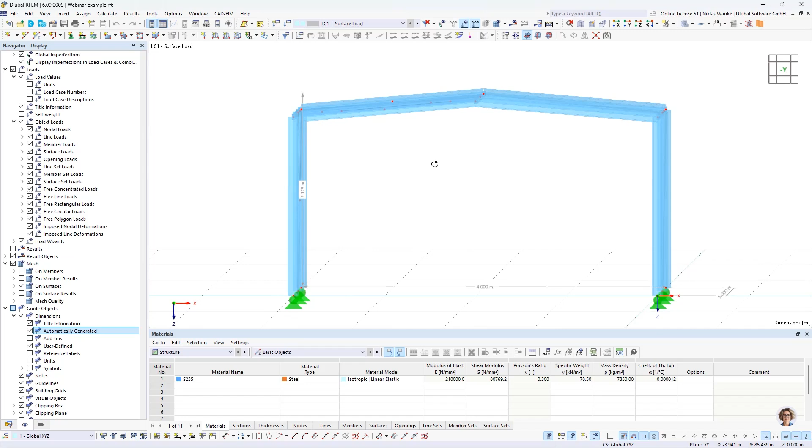It's a really small hall, 4 meters by 5 meters. Maybe you can park your cars under it or something like that. The hall has a height of 2 meters, and the roof has a little pitch, so the height difference is 17.5 centimeters between the middle and the rim of the hall.

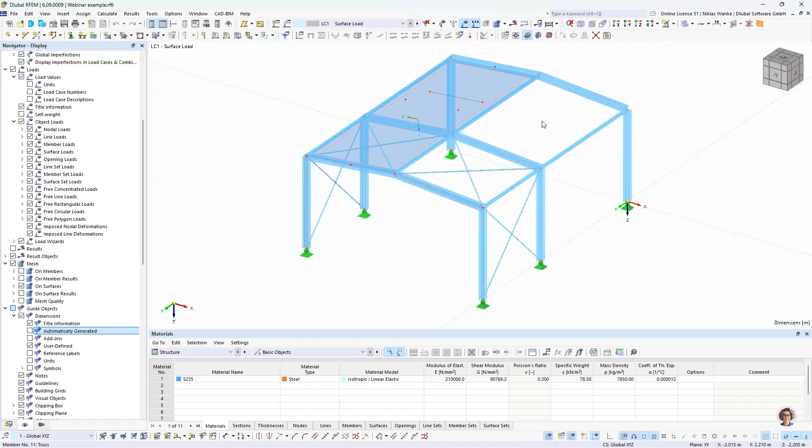As you can see, I already created one surface for one half of the roof, and this is already a load transfer surface. For the second half of the roof, we will model this surface together so that you can see the process of modeling it.

For that, I will choose the option New Surface with the option Select Boundary. Now we are in the surface dialog, and first of all, we have to select our stiffness type.

This is where the magic happens, because here you can select the load transfer surface, and that's exactly what we want for this webinar.

An alternative would be to select another stiffness type, for example standard stiffness. Then you can create your thickness and your material. In this case, it would be possible to activate the option Activate Load Transfer, where you can consider the stiffness of the surface but also do the load transferation.

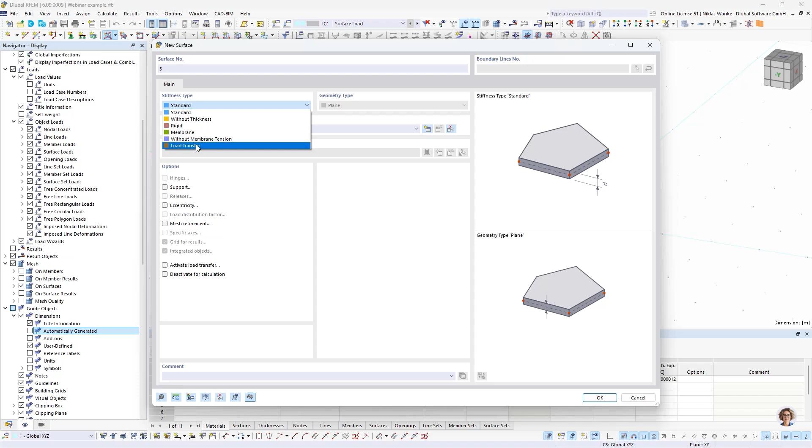But for this example, I would like to choose the load transfer stiffness type, which means we don't apply any stiffness to the load transfer surfaces, just do the load transfer. As you can see, this option is in this case automatically activated.

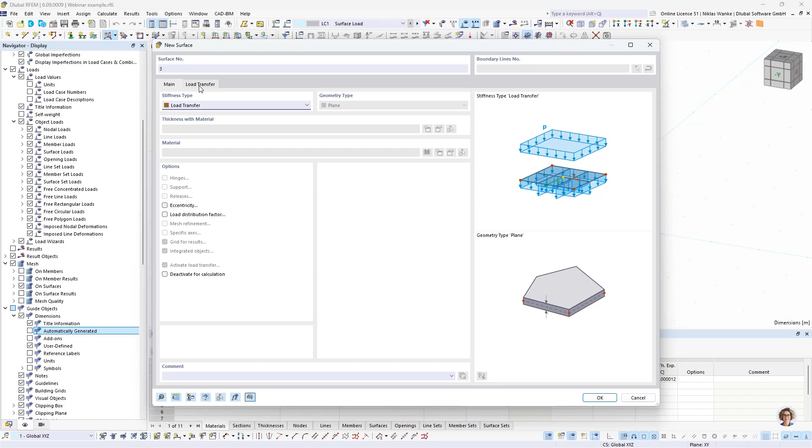By choosing the load transfer stiffness, we get an additional tab, and this is where we can make all our settings for the load transferation.

First of all, we want to have a look at the categories area, and the first setting is really important: this is the load transfer direction. Basically, we offer two different methods of load transfer for the surfaces.

The first method is called isotropic FEA, and the other method is called the stripes method. These two methods work completely differently, and we will have a look at both. But first, let us select the isotropic FEA method.

I want to give you a small explanation about how this method works. For that, we can have a look at this picture at the bottom right of the dialog, because in this picture it tries to explain how this method works.

So this first picture is what you see in the main model. You have your load transfer surfaces, you have probably a connected member or other connected objects, and you have your applied load. In this case, it's a surface load.

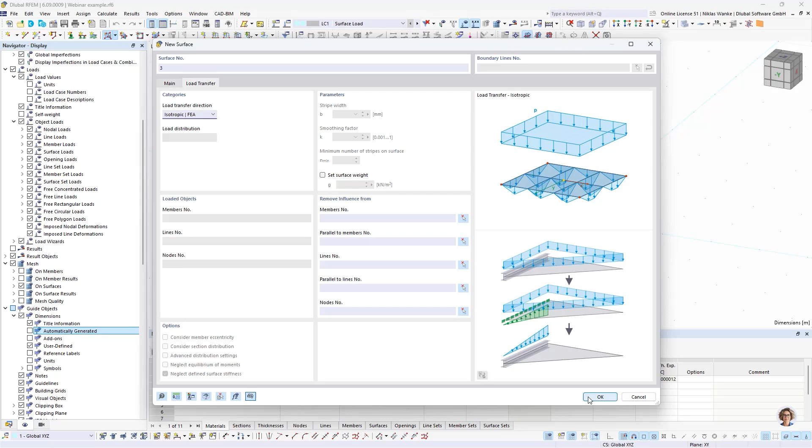But first, let us finish the creation of the surface. So I apply with pressing OK. Then we have to select our boundary lines so that the surface will be created. So that is done.

Now, of course, we also have to apply a load, because without load we would not see anything. Therefore, I create a new surface load. I want to have a load magnitude of 1 kilonewton per square meter to keep it simple, and the load direction should be in global Z on projected area.

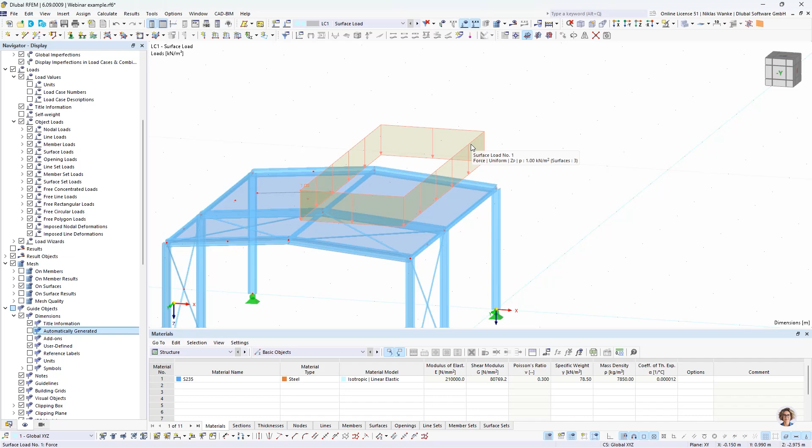We can apply this and select the loaded surface, which should be the right load transfer surface of our roof. Now we see the defined surface load, but basically that's not the visualization or the load that we want, because we want to transfer this load to the connected members.

To see how this load is transferred, we have to change the visibility a little bit. So we will go to the navigator display, and you will find the setting under Model, Surfaces.

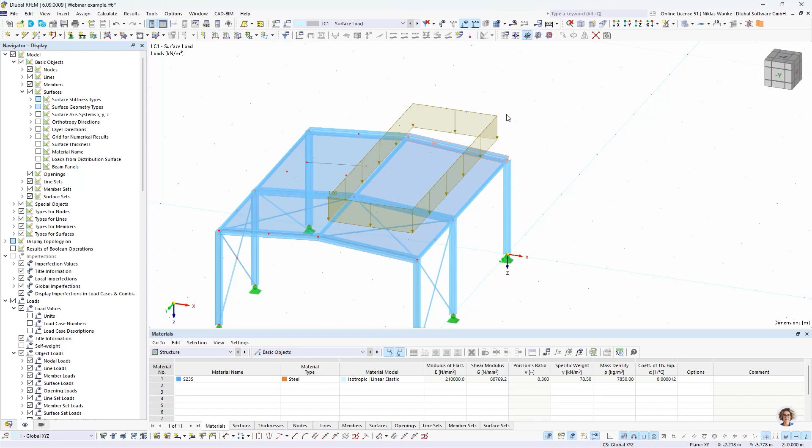Then you can see there's the option Loads from Distribution Surface. If we activate this option, then we will already see the distributed or transferred loads and not the surface load that we can see at the moment. So I will activate it.

And okay, we don't see anything. Why is that so? Because the submodel, which I talked about, has not been calculated yet. So to start this process, we have to start a calculation of this load case.

As soon as I start the calculation and the solver starts, you will see that there are two separate calculation processes. That's a hint, because the first calculation process is made for the submodel, and after that we do the normal calculation process for our main model.

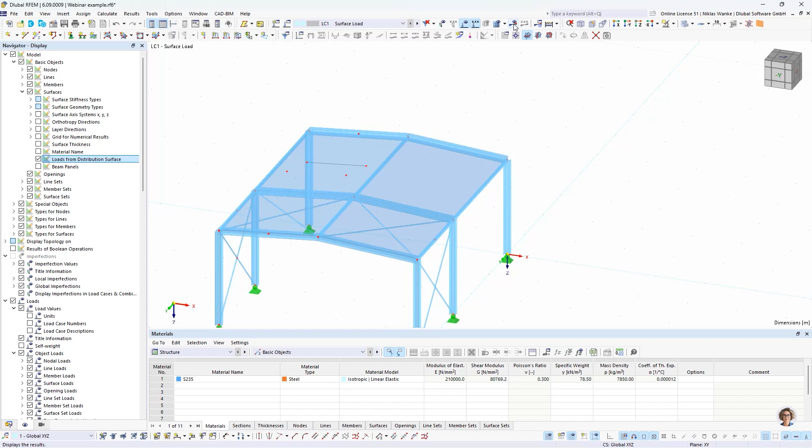So I hit the calculation button. Now the mesh is generated for the submodel, and now the structural analysis, or static analysis, is done for the submodel. If it's finished, we should see loads. That's the case now. And now the mesh is generated for the main model, and now the static analysis is done for the main model.

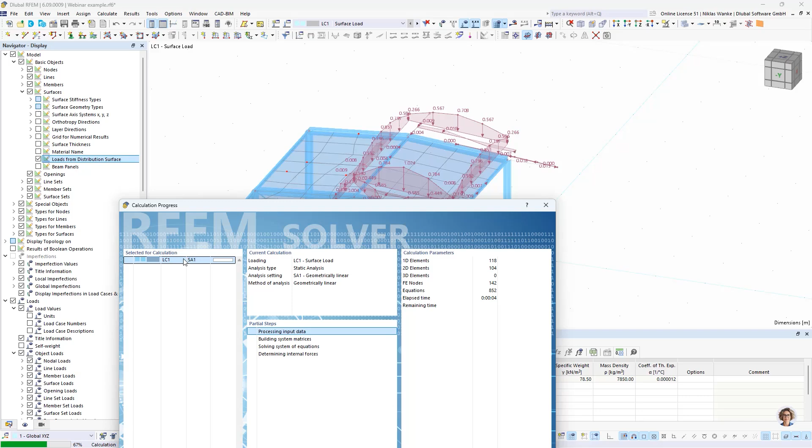After that, we will receive our results for the main model. I think it's clearly visible in the solver that the submodel has to be calculated first, so that we receive these transferred loads.

In this case, my horizontal bracing has also received some loads, and probably that's not what I want. But that's not a problem, because we can simply deselect these members to be loaded. For that, we go back to the load transfer settings.

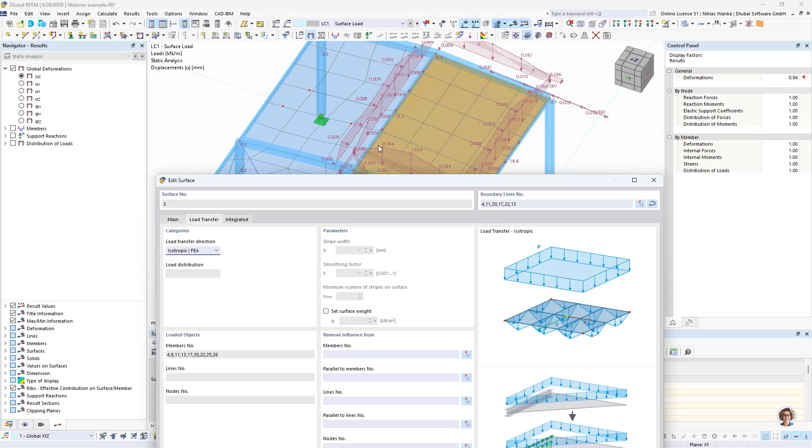Here we can select in the middle part of this dialog which objects should be loaded. By default, all members, all lines, and all nodes which are part of the surface, so these are integrated and connected objects, are loaded by default. But we can remove the influence of some of these objects.

For example, I will choose the members of my horizontal bracing. By clicking OK, we of course have to calculate again, but then these members won't be loaded anymore.

It's also possible to select one member and all members which are located parallel to the selected member, and then remove the influence from all these parallel members. The same applies for lines and parallel lines, and for nodes.

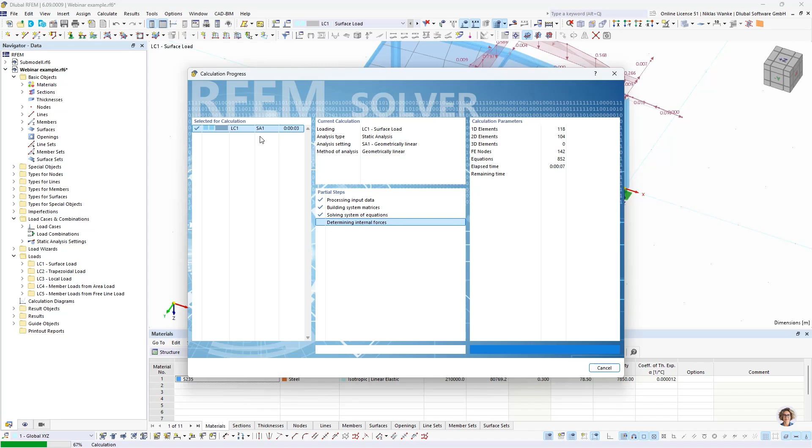Okay, let's calculate this again. Here we see again that it's calculated two times: first time for the submodel, and second time for this steel hall model. That was the first time, and now the steel hall is calculated. And now it's finished.

Okay, so now we received our transferred loads. I can also switch back to the original load, which is the surface load, and switch back to the transferred load. In this case, we only have member loads.

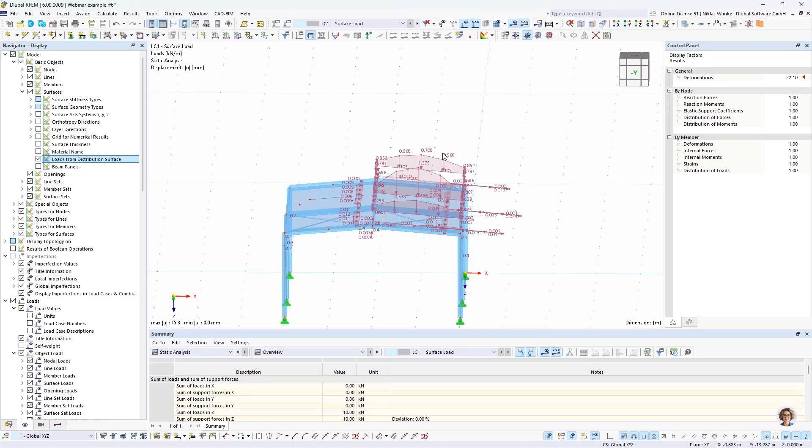The main load is a vertical load as expected, and we have some small effects which result in horizontal loads, but most likely you don't have to pay any attention to these loads because they are really small, like 0.001 or 0.02. That is just an effect of the FEM calculation.

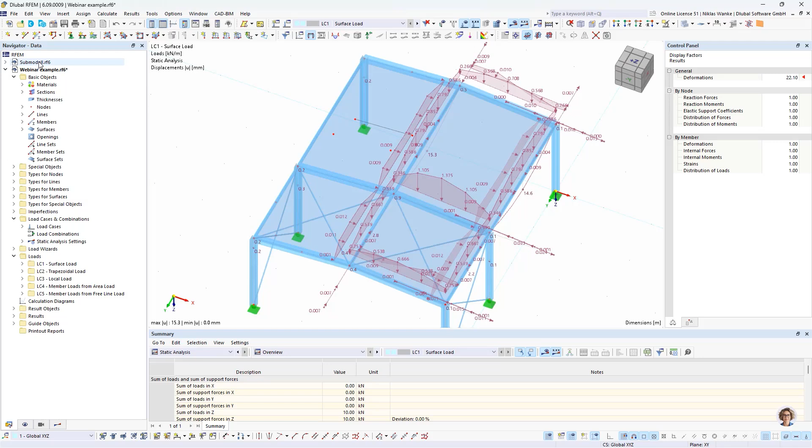Okay, I would like to show you the submodel as well. I prepared this in a separate model of RFEM 6. I just created the submodel of this one load transfer surface. As you can see, we also have the roof pitch, and the surface load on the surface. In this case, the members, as I said, are now modeled as fixed supports.

The definition of the surface is a bit special. It's not a complete rigid surface, but a surface with the stiffness type standard and a defined stiffness matrix. Let us look into the stiffness matrix. We will see that the different stiffness coefficients are set to a relatively high value, like 1e+10 or 5e+9, or maybe here also 1e+11. So this is a really high stiffness, but it's not a complete rigid surface. It still has a finite stiffness.

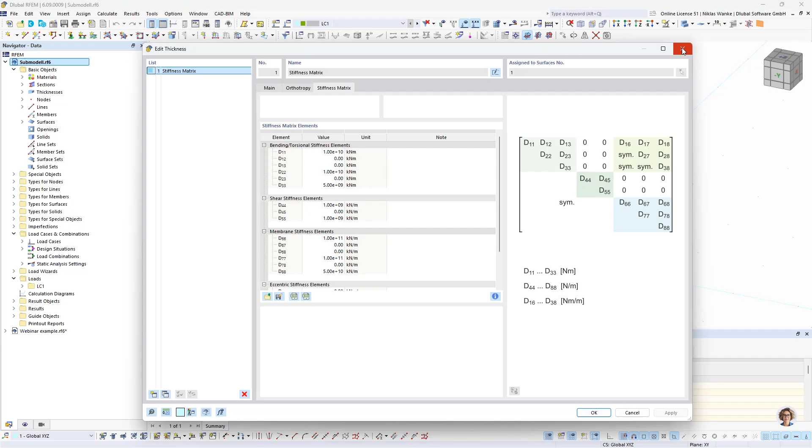The reason for that is because this leads to a better result, or to a better load distribution. That's why this load transfer surface is set to this stiffness in the submodel.

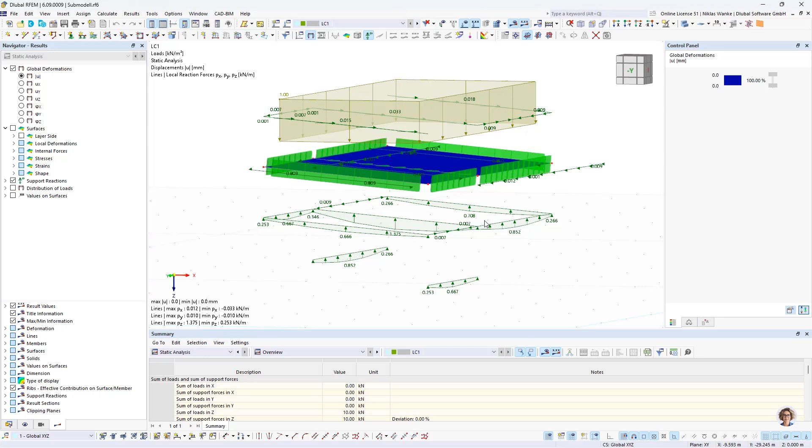If we calculate the system, then we will receive the support reactions of these fixed supports, and this will be exactly the load which is applied in our main model. So for example, we can remember this value here, which is the peak value of the middle rafter.

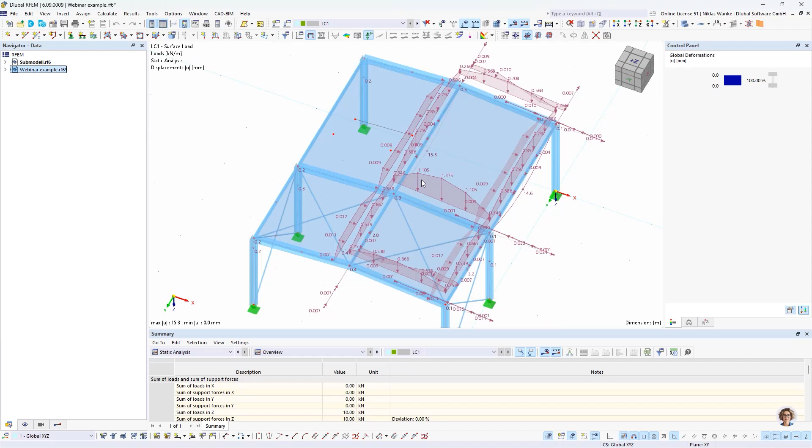In this case, we have 1.375 kilonewton per meter. And if we switch back to our main model, we will find exactly this value, which is 1.375 kilonewton per meter. So, I think we have proved that it is the same.

Okay, so let's go back to the definition of the load transfer surface. This time we will have a look at another method, which is the stripe method.

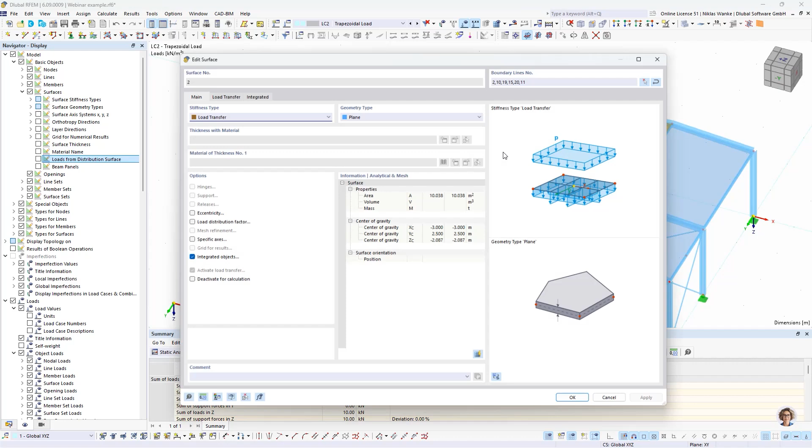Therefore, I will go to a new load case, the second load case, where I defined a trapezoidal load for the left side of the roof. Let us have a look at the load transfer surface, which I have already defined.

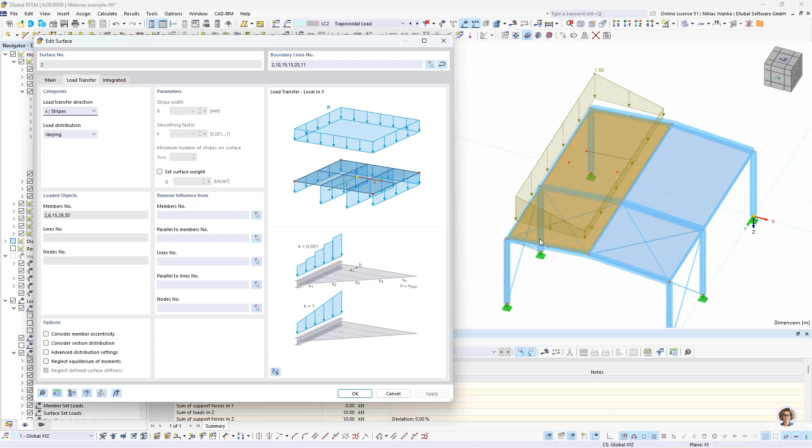So we go back to the tab load transfer. And in this case, we see we have defined X stripes. And this means that the surface, which we see here, is divided into many, many stripes along its local x-axis.

If we strive over with our mouse, we can see the local x-axis is located in this direction. So it means that the surface will be cut or divided into many stripes, like I am showing with my mouse. You can imagine it like if there would be many single beams lying in this direction on the roof.

And every of these beams or stripes is loaded with this trapezoidal load. And always if such a stripe cuts a member, like these rafters or the horizontal bracing, then these members will be loaded by the stripe. I will first select the loads from distribution surface so that we can see the result of the load transfer. As we see now, the horizontal bracing is also loaded, and our rafters.

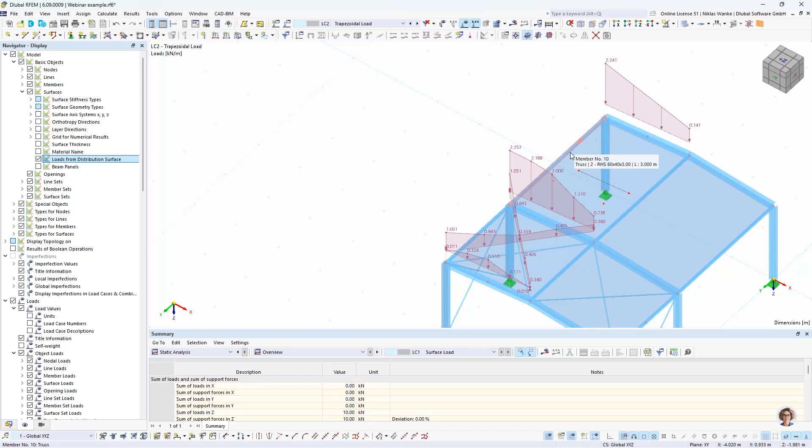What is not loaded is the purlin of the rim and of the middle. The reason for that is because the purlin is completely parallel to the stripes direction, so it does not receive any load. If we change the stripes to Y stripes, then the purlin should be loaded and our rafter should not be loaded anymore. So I will change it and apply.

Now we see the purlin is loaded, but the rafter is not loaded anymore. So these are the two options you have to divide the stripes in X or Y direction. The third possibility would be to mix these two stripe directions, so in this case you have X and Y stripes, basically a mix of the two methods. If we select it, you will see that now all members, unimportant of their direction, are loaded.

Another option that comes with the stripes method is the load distribution. Normally it's set to varying, but it's also possible to set the load distribution to uniform, and in this case you will always receive a constant load distribution on any object. So if I set it to uniform, we will see that this linear load distribution will change to a constant load distribution.

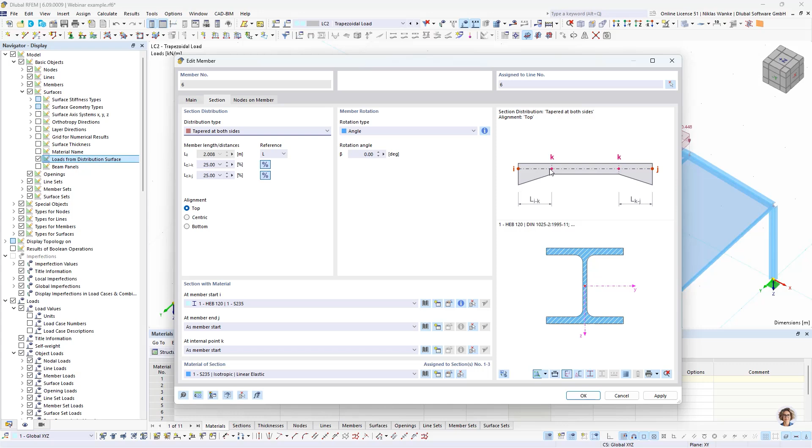This can lead to small differences between the load transferation, but the difference should not be too big for most cases.

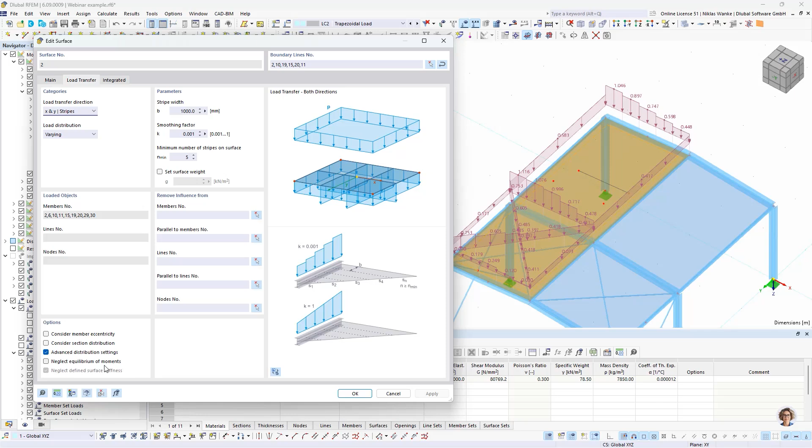One last option is neglect equilibrium of moments. By default, the setting is deactivated, which means that the equilibrium of moments is considered. I can show you that in my third prepared load case. Here I defined some local loads on our load transfer surface: two nodal loads, a free line load, and a free rectangular load.

This could probably happen if we have, for example, air conditioning on the roof, or if there are pipes connected with the roof. So these could be cases where we have such types of loads on our roof, and of course it's also possible to transfer these loads applied on the surface to the connected objects like these members.

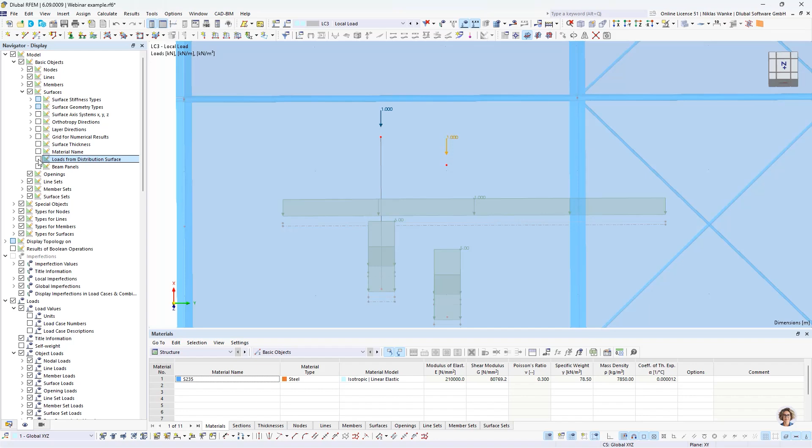Normally, the equilibrium is considered. This means, for example, for this load, it's located at 2/3 of the span of this roof. So 2/3 of the load would go to the right rafter, and 1/3 of the load would go to the left rafter. This is the case, as you can see.

I still want to change something. I will change it back to X-ray so we can see it a little bit clearer. As I already explained, 2/3, which is the value 0.667, goes to the right rafter, and 1/3 of the load, which is 0.333, goes to the left rafter. Equilibrium of moments is considered for the distributed, or for the transferred, loads.

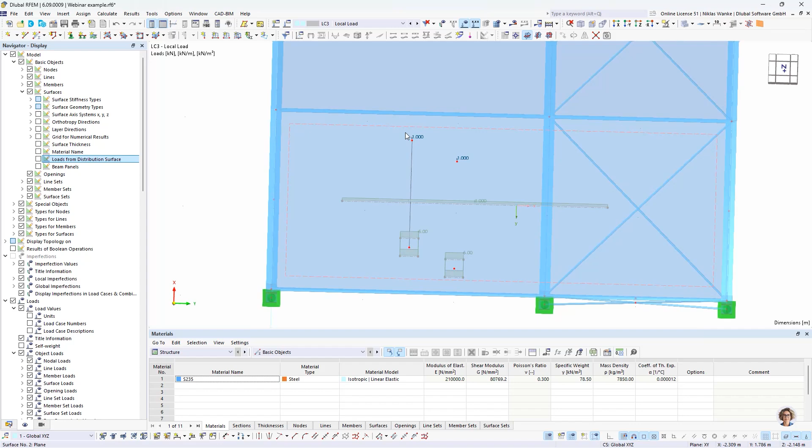Same is for all other types of loads. But now, if I activate the option neglect equilibrium, then the equilibrium does not matter anymore. So what does it mean in detail?

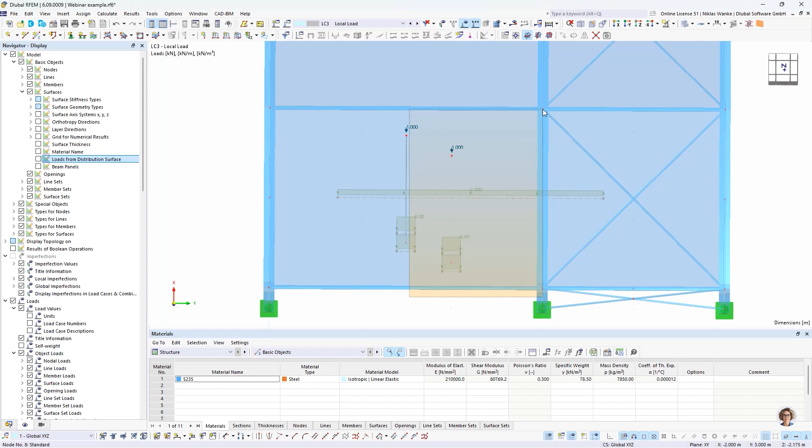It means that now you can imagine there's a cut done in the middle of this span between the left and the right rafter. Every load located on the left side of this cut will be transferred to the left rafter, and all load located on the right side of the span will be transferred to the right member. This would mean, for example, that this free rectangular load, which is completely located on the right side of the span, will be completely transferred to the right member. So that's different to the case before.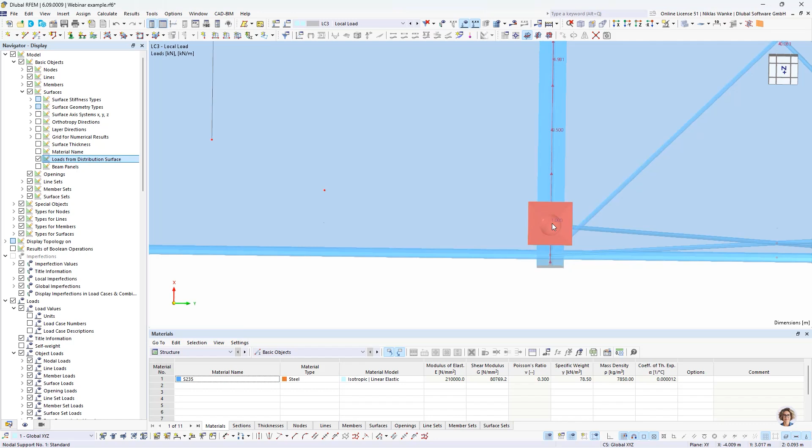If I activate the load from distribution surface, we will see this. Now we have the complete load on the right rafter of this rectangular free load, and on the left side, we don't have any load in this case. If the load is located completely in the middle, then it will still be like before, so we have half on the right and half on the left.

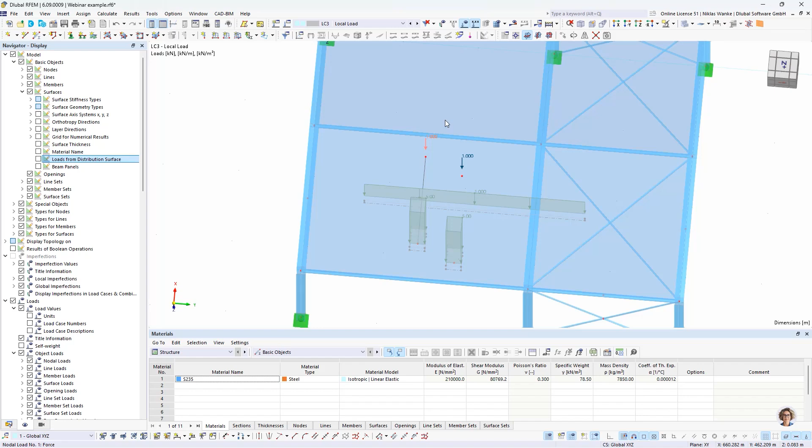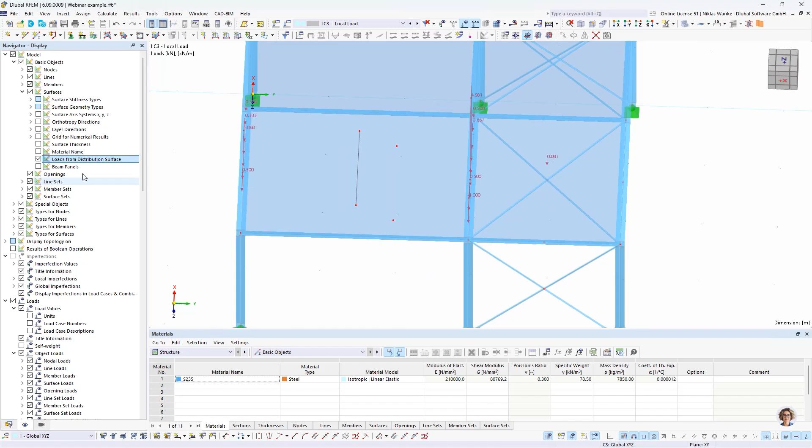There's also one special case, because for these loads, which are nodal loads, the equilibrium is always considered correctly, also if the option is activated. So also for this load, which has eccentricity to the middle of the span, the loads are still distributed 2/3 and 1/3. But for all other loads, the equilibrium won't be considered anymore in this case.

Okay, I just remembered one thing that I would like to show you again. By now, we always only transferred the surface load on this load transfer surface to members which are connected to the surface. But I would like to show you that it's also possible to transfer it to lines or to nodes, like shown here.

Now it's not transferred to these objects. The reason for that is because these nodes and this line are no structural objects. It's just geometry, and it does not have any stiffness or something like this. So that's the reason why the loads are not transferred.

But if I, for example, put such a nodal support on this node, then it will instantly also receive a load. Same is for the line. I could put a line support there, and then we will see, okay, now also the line has some loads transferred to it.

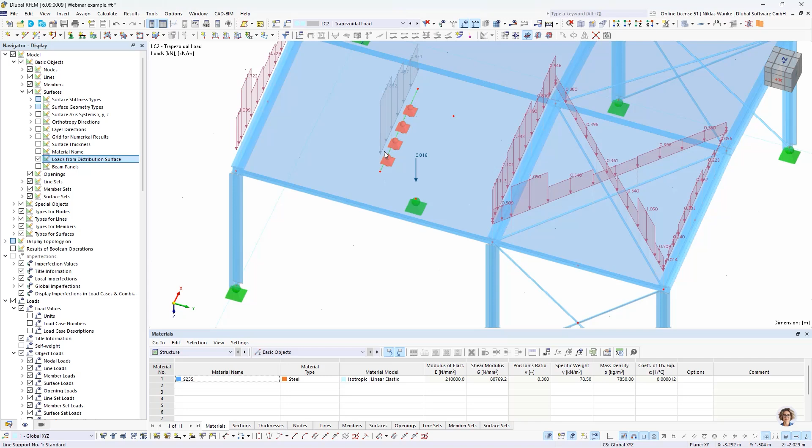Of course, that's also possible, for example, if you have a wall which is connected to the load transfer surfaces in this line, then also the wall will be loaded. And same for the nodes. If we put a column on this node, let me do it really quick, then also this column, of course, has a stiffness and will be loaded.

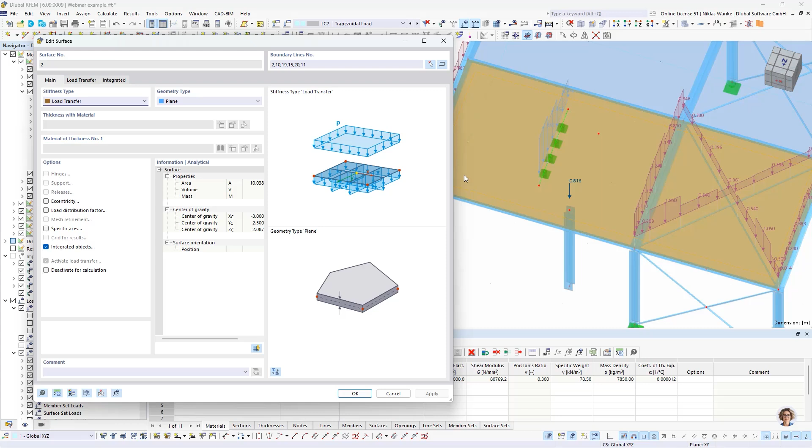One thing you have to keep in mind is that only the load of this stripe, which the node or the line is located in, will be transferred to the column. This means if you select the stripes method in this case, it really depends on the stripe width. Now we have a very big stripe width, we only have 5 stripes, so the column is getting a relatively high load.

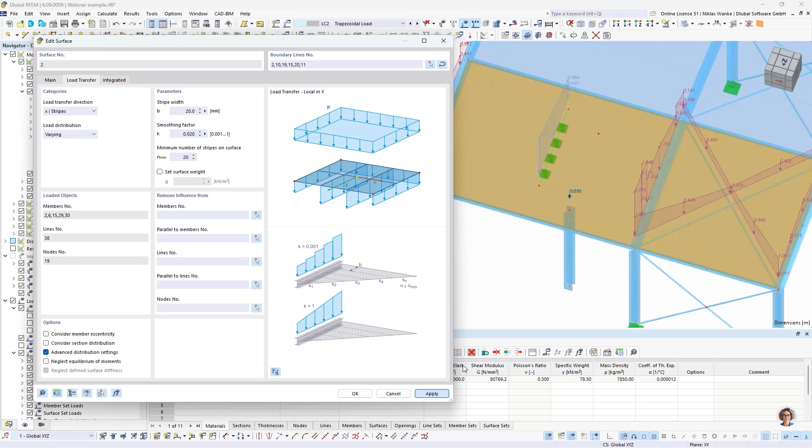But in the normal default setting, let me change it back to the default setting, we only have a stripe width of 10 millimeters. This means that the column will only receive a really small load. If I press apply, you see now it's only 0.02. And if I double up the stripe width, we will receive the doubled loading, which is 0.04 now. So that just means the stripe width has a big influence on the loads on columns in this case.

This is why I would recommend to use the isotropic method if you have some structure like this.

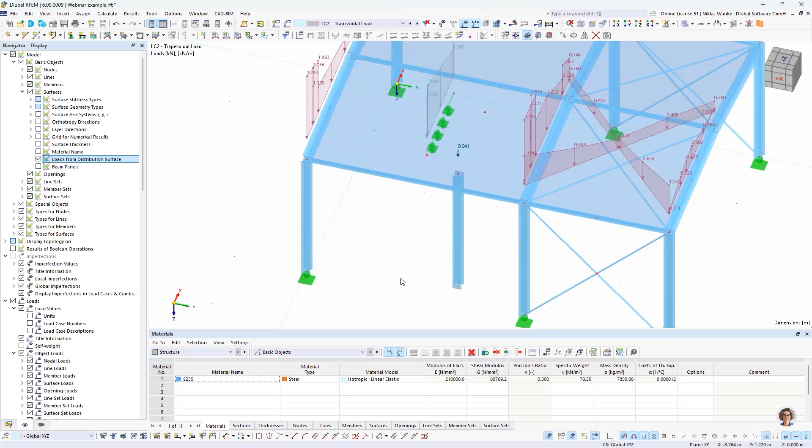Okay, let us remove the column and the line support, because in this case it would not make much sense to have a column here. And now we are back to the default system.

One last thing that I would like to show is that load transfer surfaces can also be used for other geometry types, so you don't necessarily need a plane surface. You can also use curved surfaces like quadrangle. Load transfer works the same, and it's still possible, and I think that's a really useful feature and a big advantage.

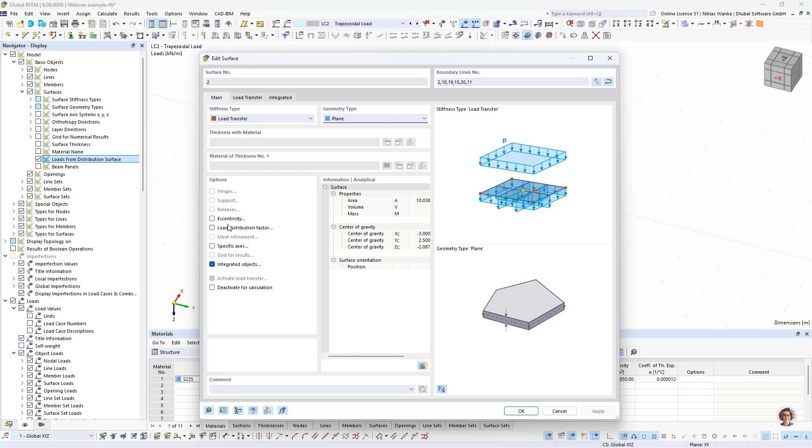That's basically the last thing I want to explain for the load transfer surface: the load distribution factor. That's an additional option for the load transfer surface, and if you activate it, you can define load distribution factors if you want.

By changing the factor for some members, for example, I can say this member should receive a higher distribution factor, and we choose 1.3 or something like this. Then we will see that the transferred load will increase. I have to apply it, of course, and now you see the load has gotten bigger.

Be careful with this function, because if you increase or decrease the distribution factor, you will also increase or decrease the sum of the loads. So you will receive a higher surface load, or a higher load at all. This means you increase the absolute values of this load, and it's not relative to the sum of the loads.

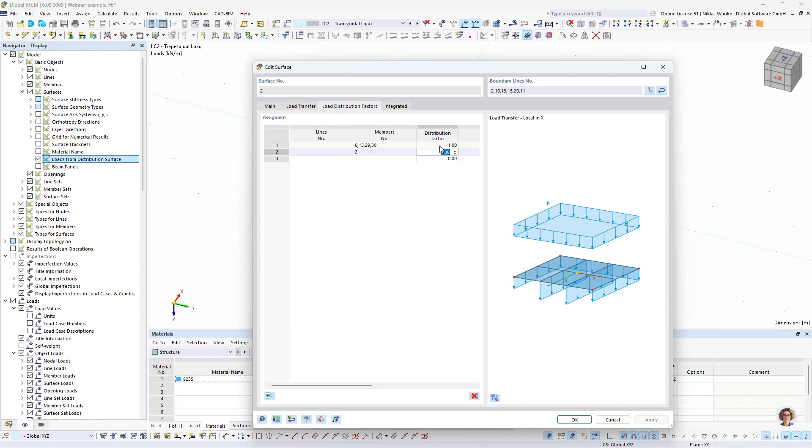But in my opinion, it's also a really useful feature if you want to manually have an influence on the load transferring. Okay, that's already everything I wanted to explain for the load transfer surface.

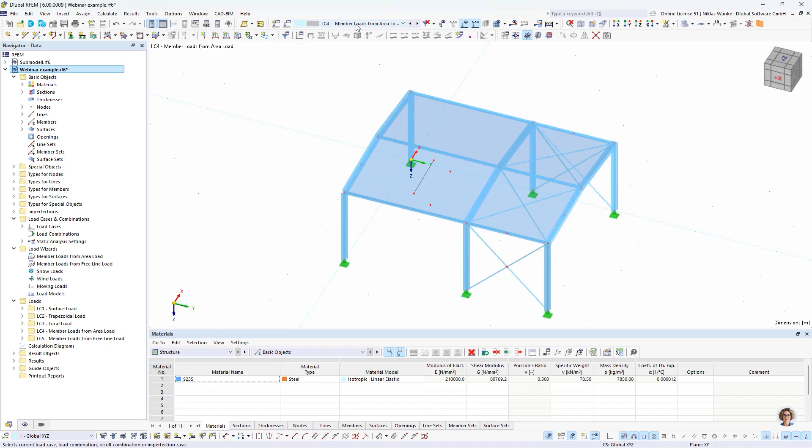As I said at the beginning, we also have two other points we want to look at today: the two load wizards, member loads from area load and member loads from free line loads. To show that, I will switch to load case 4 that I already have prepared, and use it to show you the first load wizard, member loads from area load. For example, we could imagine that we want to apply member loads from an area load, which is the result of a wind load on our steel hall wall.

Therefore, we can create a new load wizard. We can do this by double-clicking here, or by right-clicking and selecting the option New Load Wizard.

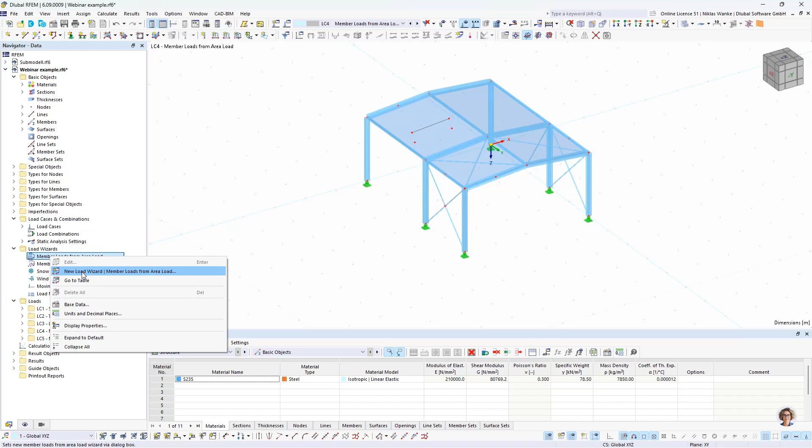Now we see the dialog for the definition of member loads from area load. This load wizard has an advantage: we don't have to manually define our surface, like we had to do for the load transfer surface. So we don't need any surfaces at all. That's especially an advantage if you are working with RSTAB, because there you don't have any surfaces available, and you can still use the load wizard member loads from area load.

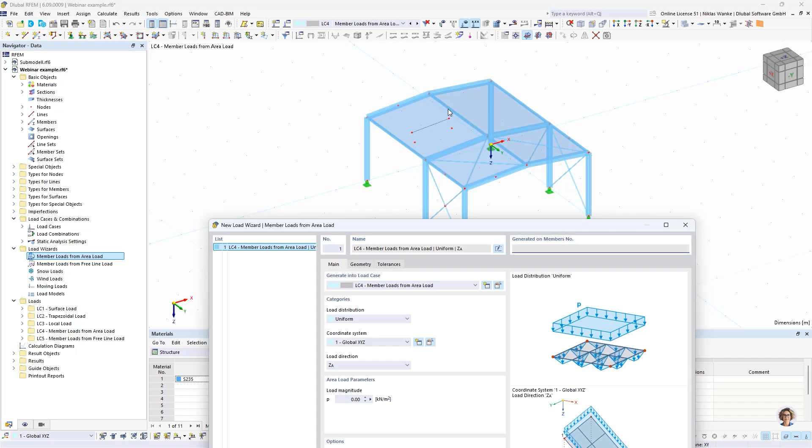The disadvantage of this load wizard is that you can only apply surface loads. For the load transfer surface, we saw that we can also apply nodal loads and free loads, so we can apply every type of load to the surface. For this load wizard, only surface loads.

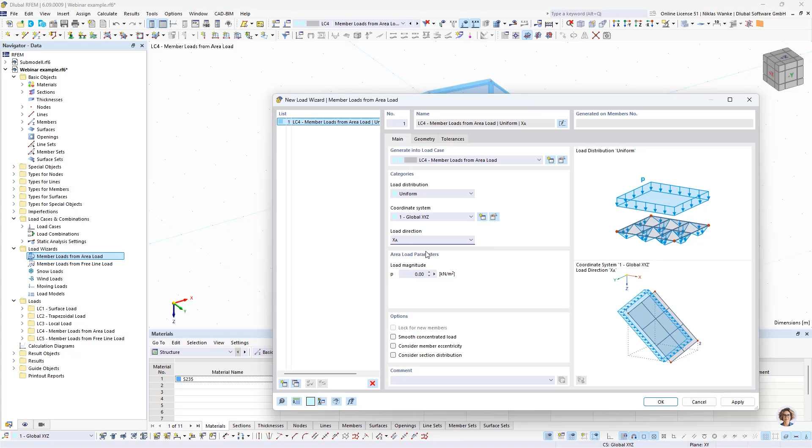Okay, let us generate our load. We want to generate it in load case 4, and we want to choose the uniform load distribution in global X direction, so I choose global X. And the load magnitude should still be 1 kilonewton per square meter, to keep it simple.

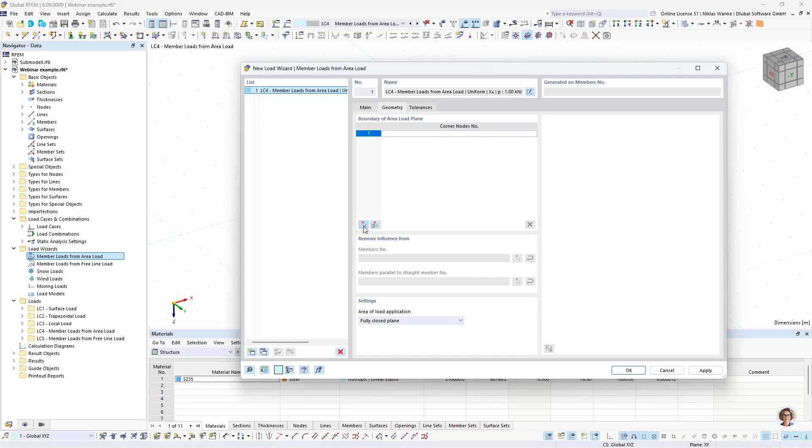There's one more thing we have to define to finish the input for this load wizard: the geometry of our surface load. We can pick our corner nodes for the area or surface we want to apply the load on, and I think the easiest way is to pick the nodes in the main model. So I select the corner nodes here of our wall of the steel hall.

And now we are ready to go, so we press OK, and that is the result. Normally, by default, we still see our defined surface or area load, but again, it would be interesting to see the transferred member loads, because these are the real loads considered for the static analysis.

To achieve this, we go back to the navigator display, scroll down a little bit to load wizards, then member loads from area load, and here we can choose the option display separately. Now we see the load distribution on the members. Alternatively, you can also select the load wizard load, right-click, and choose display separately — it's basically the same.

Okay, now we see the loads, and you might wonder why there's such a corner here, and here's also a little corner on this load. I can explain why this is happening.

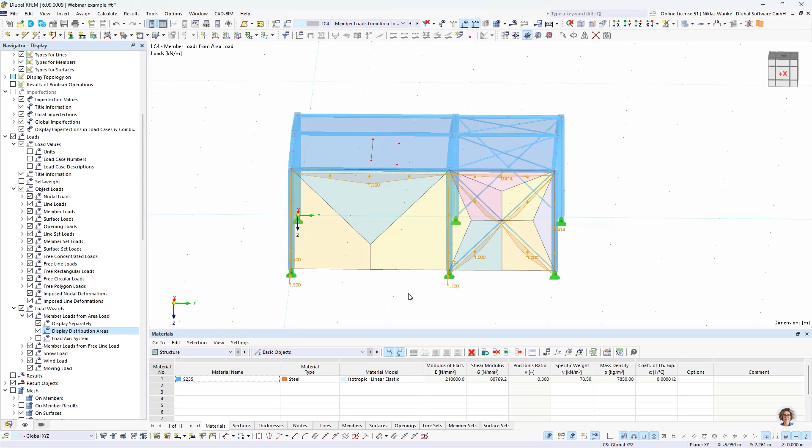In this case, it's really useful to have a look at the distribution areas of this load wizard. This is possible to show in RFEM 6, and I think it's a really powerful and cool feature. To achieve this, we go to the navigator display and select the option display distribution areas. I enable this, but I still don't see anything because I first have to select the load wizard that I want to show the distribution areas for. Now I select it, and we get a really nice overview of the distribution areas. By seeing that, it becomes a little bit clearer why we have these peaks or corners in the load. Now it makes much more sense, and it's a good visualization option in my opinion.

Let us go back to the definition of this load wizard and have a look at the additional options. These two options will be familiar to you because they're the same as for the load transfer surface. Here you can also consider the member eccentricity and the section distribution if you want. So it's completely similar to, or identical to, the load transfer surface.

Then we also have this first option, which means lock for new members. By default it's deactivated. That means if I would create a new member now, like an additional column, it would be synchronized with the load wizard, and this additional column would also be loaded, or the loads would be transferred to it or to any new member. If we check this box, we can lock this state we see here, and I can add any new members in this plane and they won't be loaded.

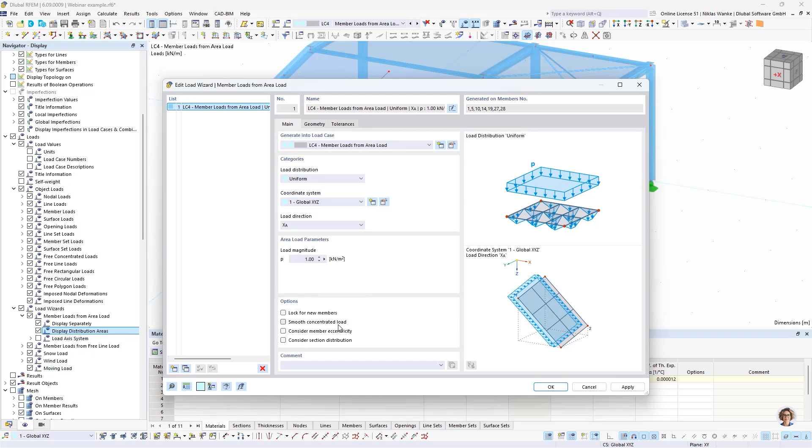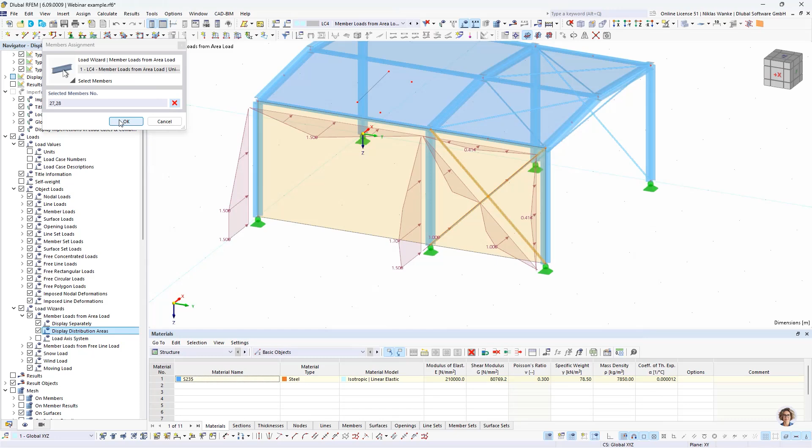The smooth concentrated loads option I will show in some minutes, but first we will switch over to the geometry tab. Here we also have the option to remove the influence for some members, basically the same as for the load transfer surface. For example, if I want to remove the influence for the horizontal bracing, I can do it with the selection. I apply it, and now we see the horizontal bracing is not loaded anymore, but the other members receive a slightly bigger load instead.

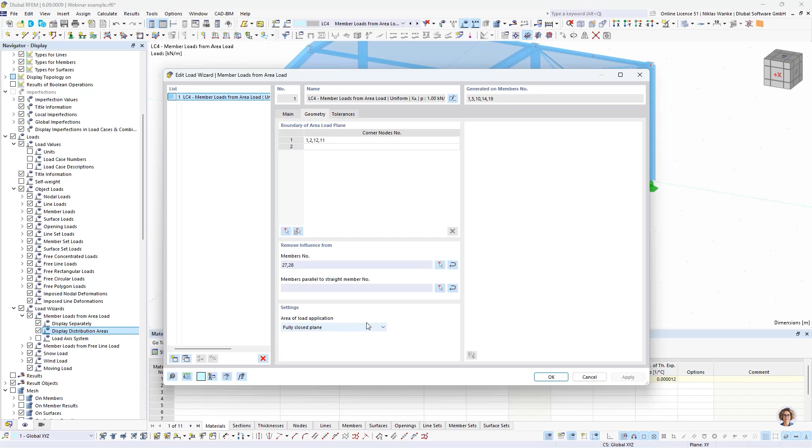Then there's also a really powerful setting, in my opinion, and you can do many things with it: the area of load application. By default, we apply the load on a fully closed plane, meaning this complete plane has an area load which has to be applied on the members. The second option would be to only have an empty plane, with the load only on the members.

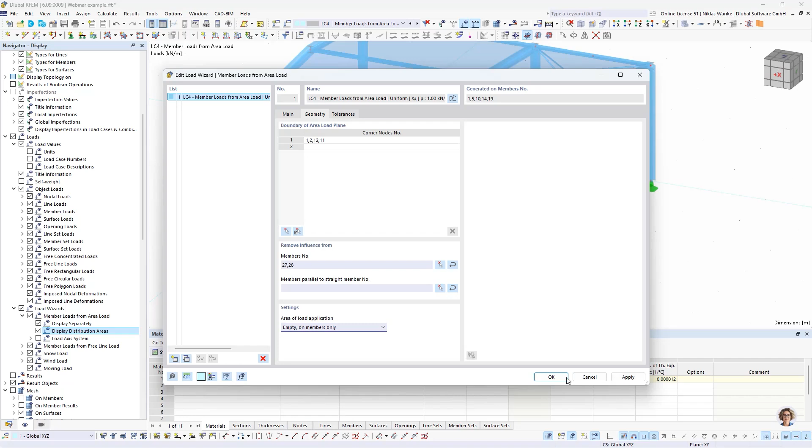Let me choose this option and apply it. First of all, we see the loads are getting much smaller, because now only the surface where we have our members is loaded. For example, you can imagine that this hall is open, so it has no wall, only the columns, and we have a wind load. The wind can flow through the hall, and it only creates wind pressure on the members. So this would normally be the use case for this option.

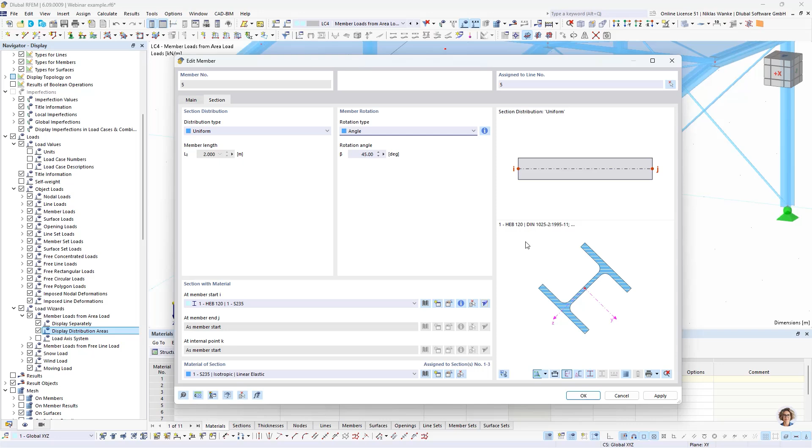What is really cool about it is that the exact surface of the section is considered. This means the columns with the bigger cross-section also receive a bigger load than the purlins with a smaller cross-section. What is also considered is the rotation of the member. If I define a rotation of 45 degrees, we will have a bigger load distribution area for wind loads, for example. As you can see, the load will increase to 0.17 kilonewton per meter, whereas with the unrotated member it's only 0.12. So that's a really powerful tool, in my opinion, and especially for wind loads this can be really helpful, for example for truss systems and so on.

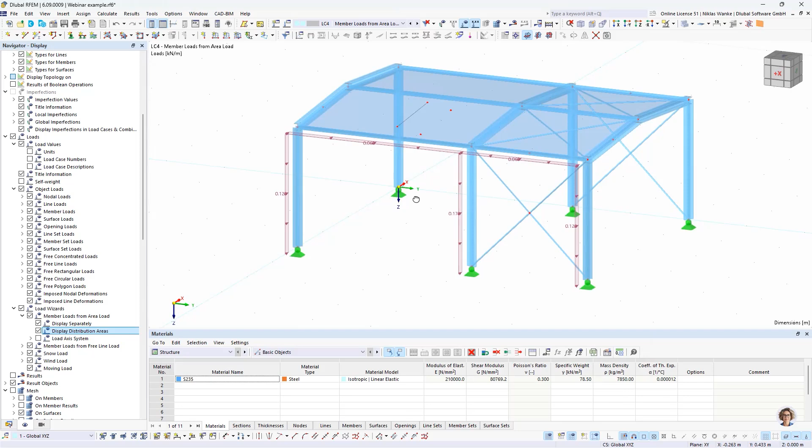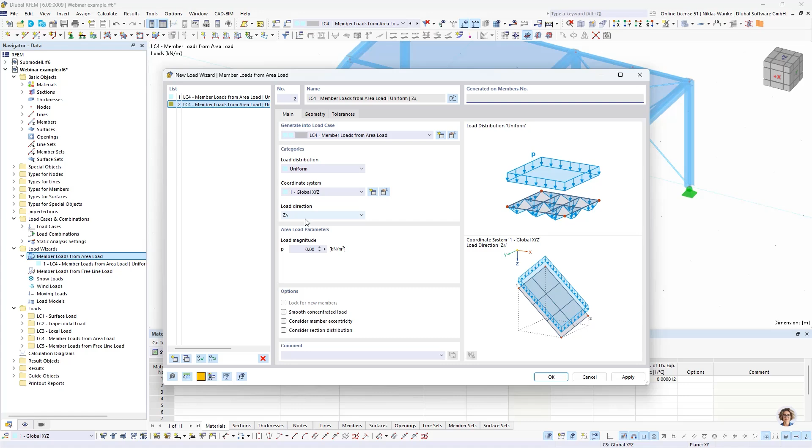To show the other functions for the load wizard member loads from area load, I would like to create one more load wizard. Basically it's possible to create as many load wizards as you want in the same model; it's not limited to one. So I will create a new one. This time I want to have global load direction in ZP direction with 1 kilonewton per square meter. I will pick a geometry which is a bit different, or a bit special. First I pick the corner nodes of our left side of the roof, but here I'll do it a little special: I pick this middle node of the surface and then complete the surface.

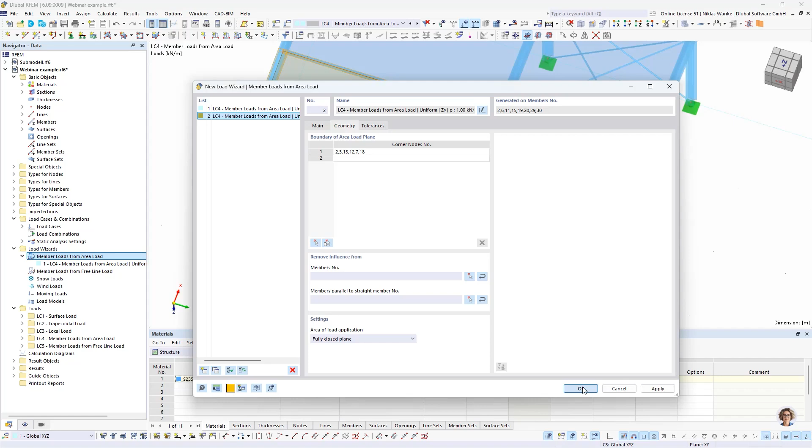So now we see that this area does not receive any loads. And yeah, we also see that the purlin, which is outside of the load distribution area, does not receive any loads. This means that only members in this plane are loaded.

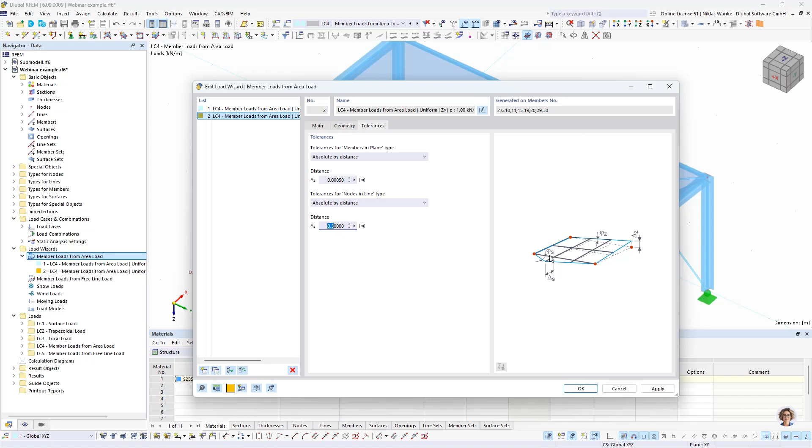But we can modify this a little bit by modifying our tolerances. For example, I could say I want a tolerance of delta z of like a really big one, 0.5 meters. This is already a really high tolerance. This would mean that also members which are located 0.5 meters outside of the plane will be considered as well. So let us apply it.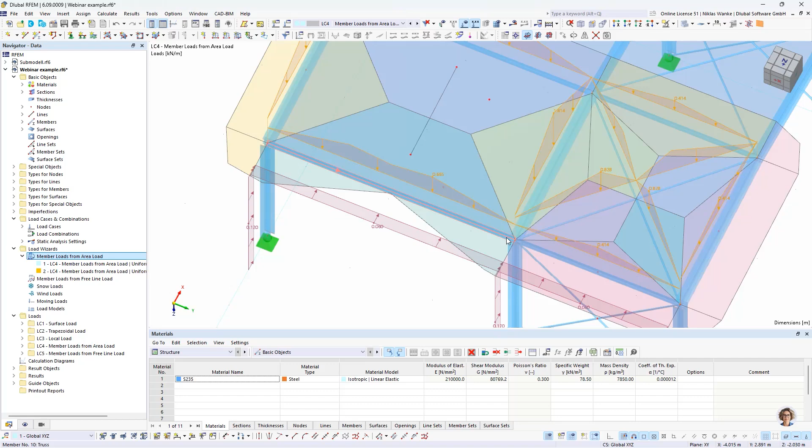And now we perfectly see again on this load distribution area that we have such a radius of 0.5 meters outside of our predefined plane. This means that every member which is located in this tolerance area will also be considered for load distribution. So in this case, this purlin is located inside of the tolerance area, which means it receives loads.

If I lower the tolerance a little bit, for example to 0.3 or maybe 0.4, then we can see that a small part of this member is outside of the tolerance area, or of the load distribution plane. And we see that this part of the member is not loaded anymore.

In this case, we have such a bit strange nodal loads on the member. This is caused because we have kind of a concentrated load in this location. If you don't want to have these nodal loads, you can activate the option smooth concentrated load.

So that's exactly for this case. If you receive some loads like this, you can, if you want, smooth them, and then the loads will be considered within the member load. So the member load will increase a little bit, but the nodal loads will be removed.

So it's up to you. You can do it if you want. Probably it will be a bit of an advantage for your system. You can decide if you want to apply it like this, or if you want to consider this as nodal loads, like it's done by default.

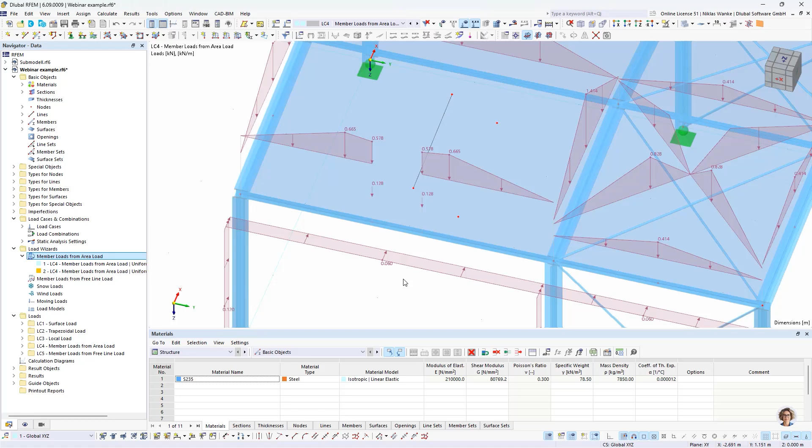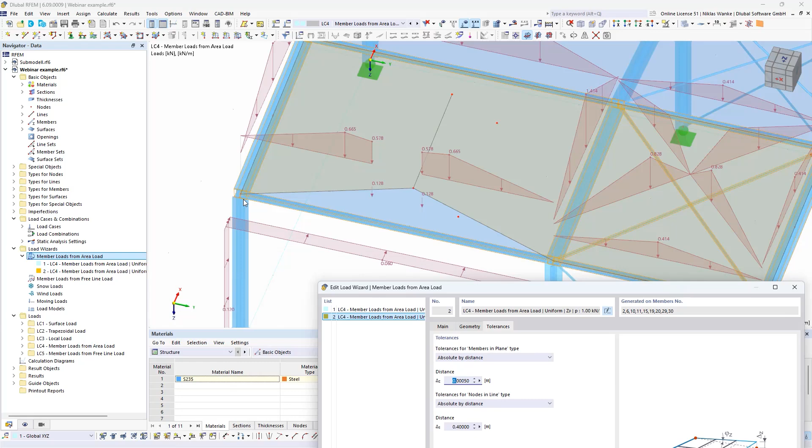I only talked about the second tolerance option, but there's also this first one, and this is for members which are out of the plane. So for example, if I would have a member which is a bit displaced in the global Z direction, so it's a little bit higher or lower, not directly in the plane that I have defined, then we can change this tolerance to a higher value to also consider these members outside of the plane.

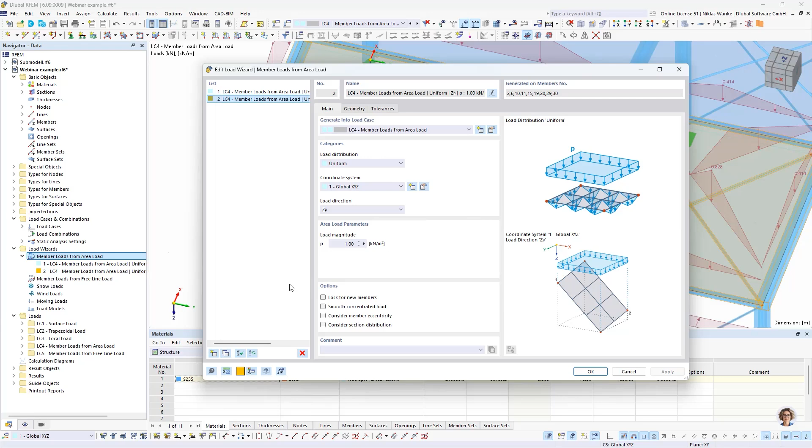So these are basically the two tolerance options that we have available. I think that would already be everything for the member loads from area load wizard. So we can go to the last one, which is the member loads from free line load wizard.

Let us create a new line load. As you can see, it's relatively similar to the first load wizard. The difference here is that we don't apply a surface load, but we apply a line load, as you can see on this small little image.

For that, we again have to say we want to define it in load case 5. We want a uniform load distribution in global Z direction. Of course, we also have defined the load magnitude, and now we need to define the start and the end node of this line load.

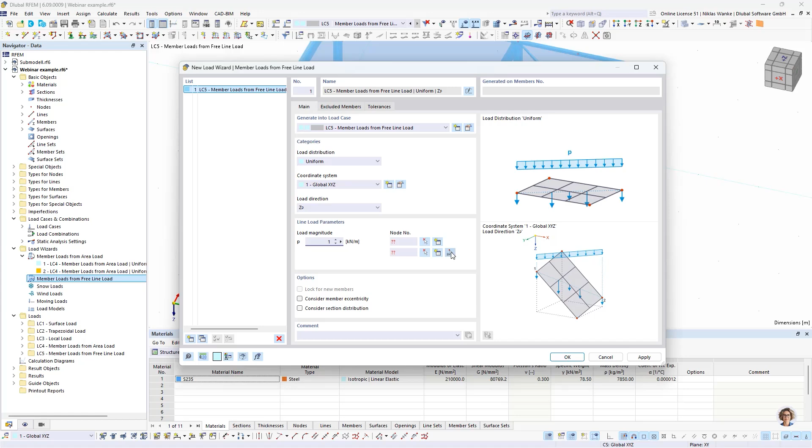I think the easiest way to do this is by picking it in the model. Best way to do this is by pressing this button, because then you can select both nodes at the same time. So I picked the first and the last node.

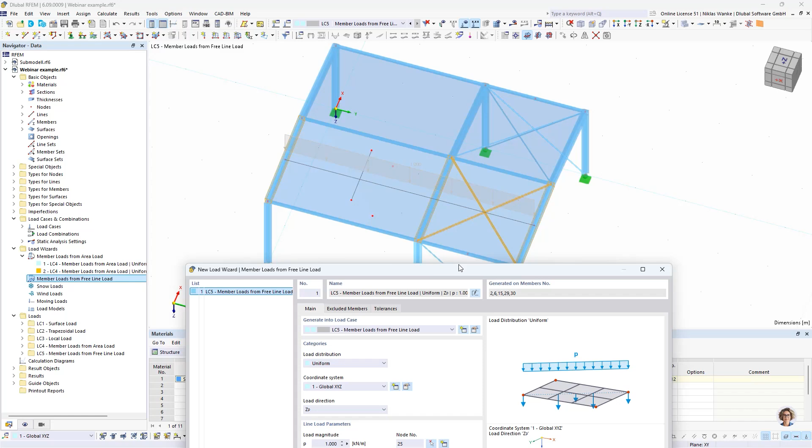You could imagine, maybe if there is a pipe or something on the roof, or technical equipment, then this could be the use case for such member loads from free line load wizard, because if you have, for example, a pipe which goes from start to end of this hall, then it has a constant load over its length. But it will be connected only with the members probably and not with the surface. So this would be the perfect use case for this load wizard.

I don't have to explain too much about the options because it's exactly the same as for the load wizard before. We can also lock this for new members so that they won't be loaded, and we can also consider the member eccentricity and the section distribution if we want.

Let's apply it. And also here we can say, okay, display separately. And then we see all our punctual member loads that have been transferred to the members. Basically all members that are cut by this line are considered for load distribution.

But also here you can define tolerances. For this load wizard, only the second tolerance is relevant, so the first one does not have any impact. But if you want to add a small tolerance, you can do it by changing this value. This would mean that also members which are not directly cut by this imagined line can also be considered.

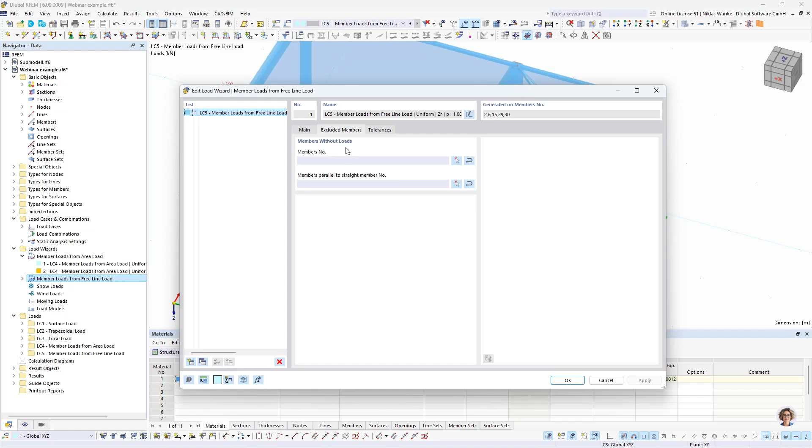And as you are probably already used to, you can also select that some members should not be loaded. So we can, for example, say, like always, we don't want to load our horizontal bracing, and apply this. So now the loads are only applied on the rafters.

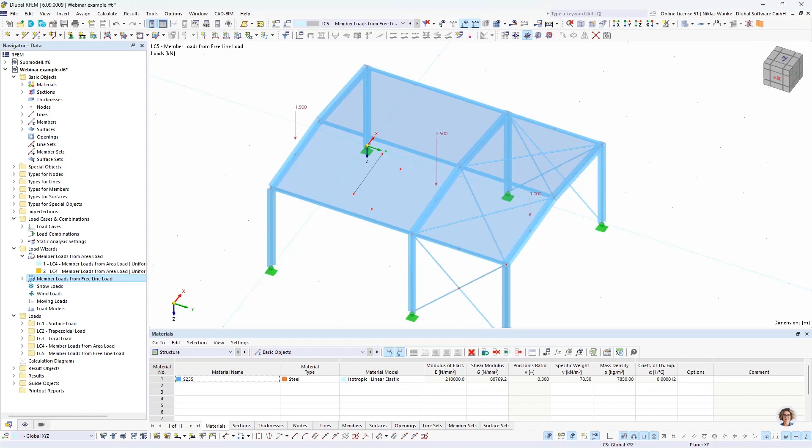Okay, so that should be it for all three possibilities of load transfer. And one last thing that I would like to talk about with you is the small outlook for planned features in the future.

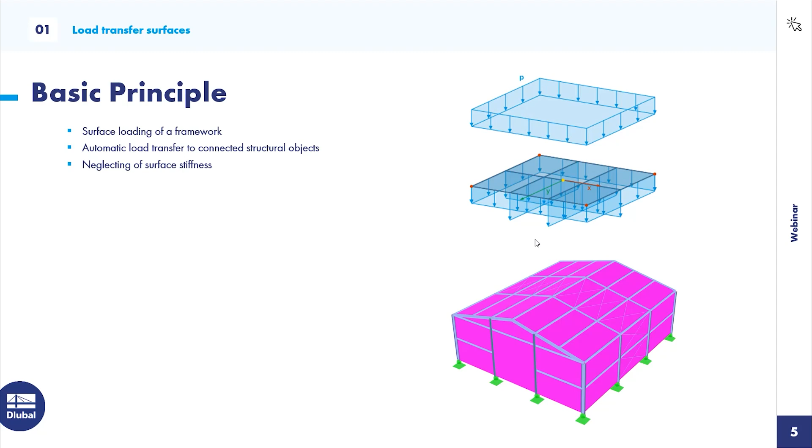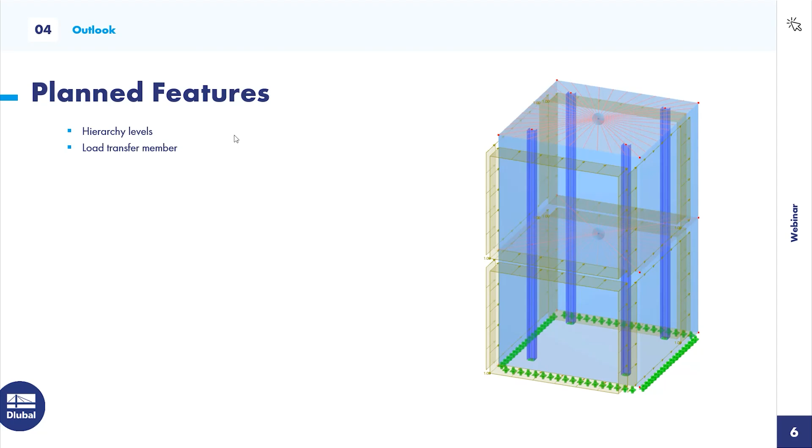For that, I will switch back to the PowerPoint presentation and go to the next page. It's not that much which has to do with the load transferation, but there are two things that I would like to tell you that we are planning at the moment. The first one is the option of hierarchy levels. Part-wise, this is already included in RFEM 6 in the actual state, for example, for the building model.

So on the right side, you can see this image. This is a typical building model, so we have walls, ceilings, and columns. The problem, or the task, is that we have horizontal loads on the walls, and these loads have to be transferred first to the walls, from the walls to the ceiling, and from the ceiling to the columns. So these are multiple steps for load transferation, and for that we need something like hierarchy levels.

So that we can define a priority, which load transfer surface should be considered first and which one should be considered next. For the building model, it's kind of clear how this has to be done. In this case, the walls have hierarchy 0, so load is distributed on the walls. We calculate the support reactions of the walls and apply it as external loads on the ceiling. Then these external loads of the ceiling are transferred back to the columns. That's the way it works in the building model.

But this could probably also be a useful feature in general, not only in the building model add-on, so probably we will receive it as a feature in the future. So you could have something like a construct of multiple load transfer surfaces and define the hierarchy, which load transfer surface should transfer the loads to the next connected load transfer surface. So something like this could happen in the future.

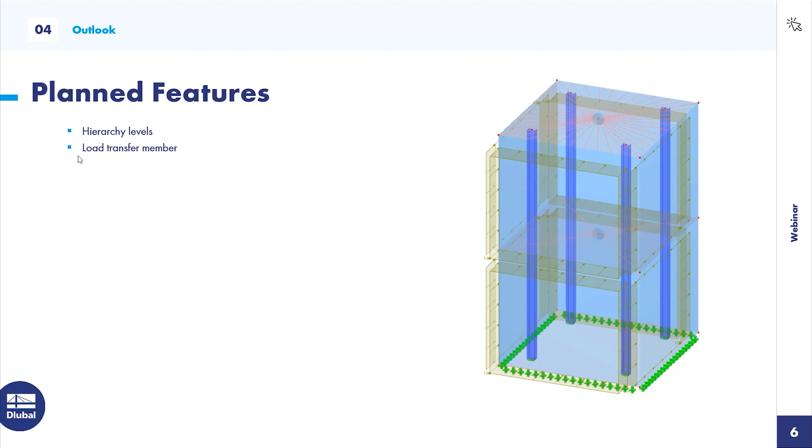Okay, with that, this was everything from my side. I hope you could learn something new for this big topic of load transfer, and I also hope that you are now able to use it by yourself and have an advantage of this feature for your own projects. Now I have said everything from my side, and I would give back the speech to my colleague Andreas.